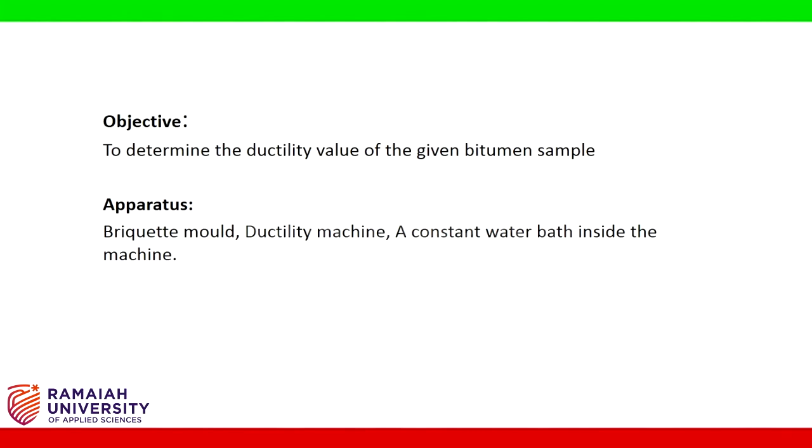In flexible pavement construction where bitumen binders are used, it is of significant importance that the binders form ductile thin films around the aggregate. Ductility is the property of bitumen that permits it to undergo great deformation or elongation. It is expressed in centimeters, to which a standard briquette of bitumen can be stretched before the thread breaks.

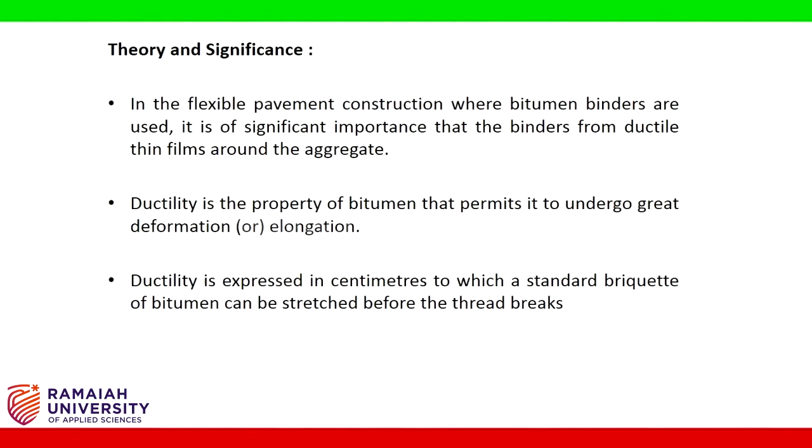Procedure: the bitumen sample should be heated to a temperature of 75 to 100 degrees Celsius, at which the bitumen softens. The sample is thoroughly stirred to make it homogeneous and free from air bubbles. Pour the bitumen sample into the briquette mold with the side clips.

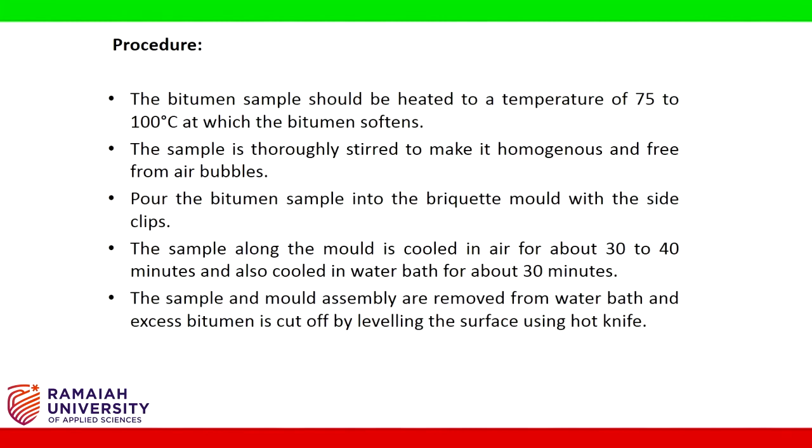The sample along with the mold is cooled in air for about 30 to 40 minutes and also cooled in a water bath for about 30 minutes. The sample and mold assembly are removed from the water bath and excess bitumen is cut off by leveling the surface using a hot knife.

After trimming the specimen, the mold assembly containing the sample is placed in a water bath maintained at 27 degrees Celsius for 85 to 95 minutes. The side clips are removed carefully. Two or more specimens are prepared in order to conduct the trials.

The pointer of the machine is set to 0. The machine is started and the two clips are then pulled apart horizontally. The ductility value is measured in terms of centimeters.

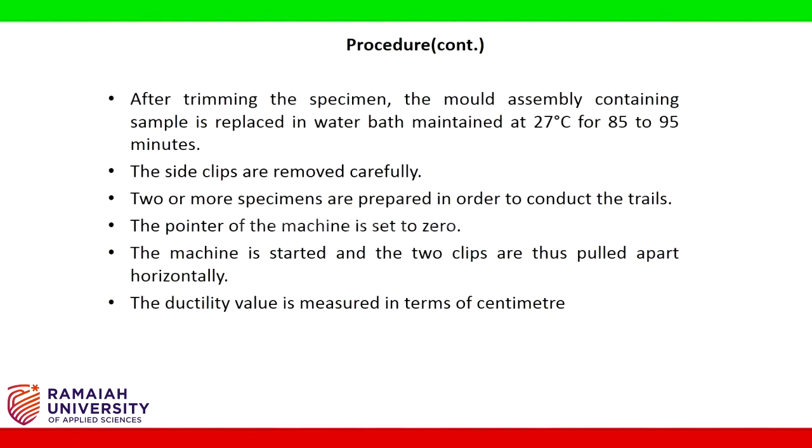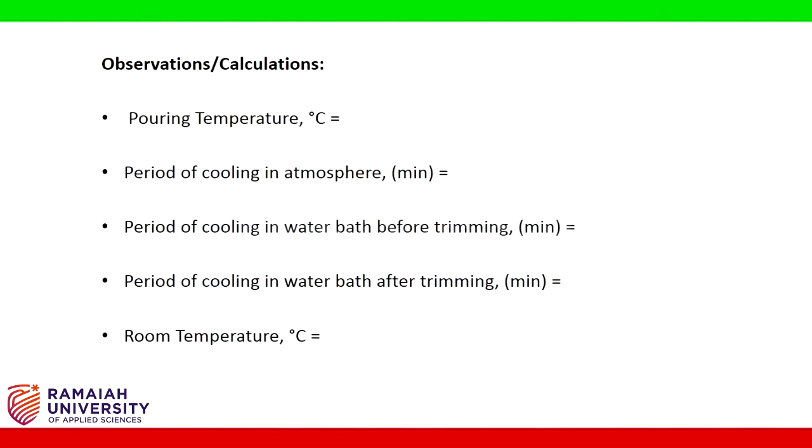Hi students, as a part of Concrete and Highway Laboratory, we are now discussing an experiment called ductility of bitumen. The apparatus required for this particular experiment is the briquette mold.

Next apparatus required is a thermometer. We require a sample of bitumen to be tested and also a hot plate.

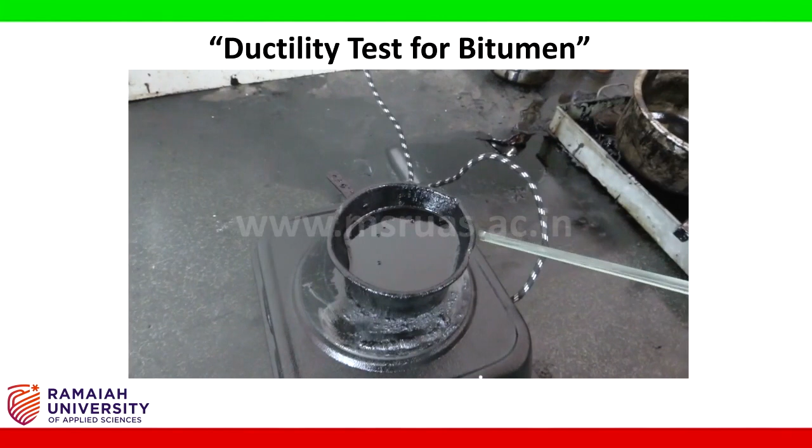Let's start doing the experiment. Make sure that the bitumen is attaining the pouring temperature. You measure the temperature of the bitumen, it should be around 125 degrees centigrade.

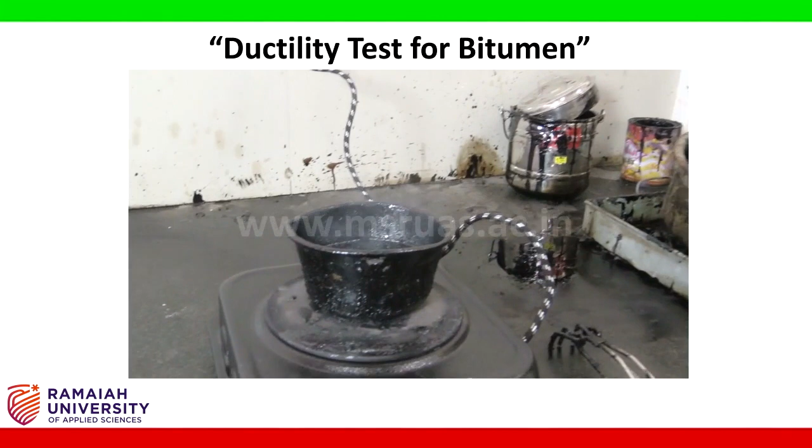After attaining the pouring temperature, we are going to transfer the bitumen to the briquette mold. Make sure that the inner surface of the briquette mold as well as the bottom plate is completely smeared with soap oil.

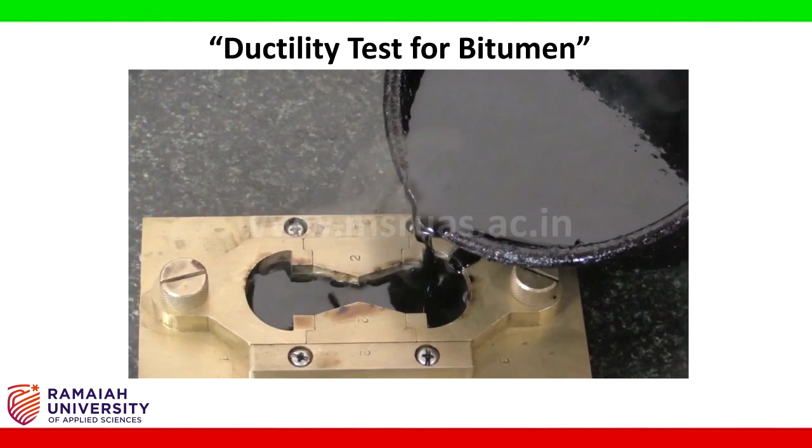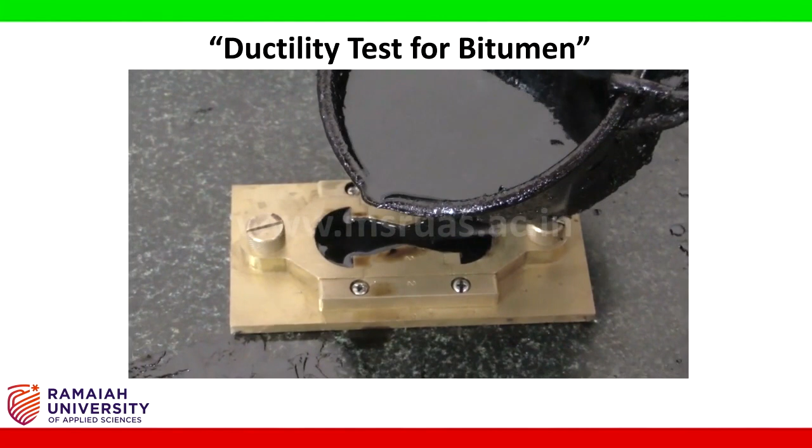Apply the pouring bitumen into it, completely to the top.

After this, we are going to make sure that the excess portion of the bitumen which is on the sides of the mold is removed completely.

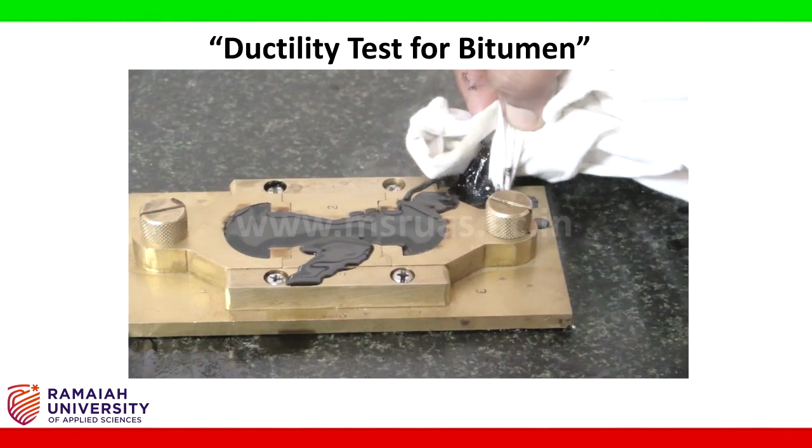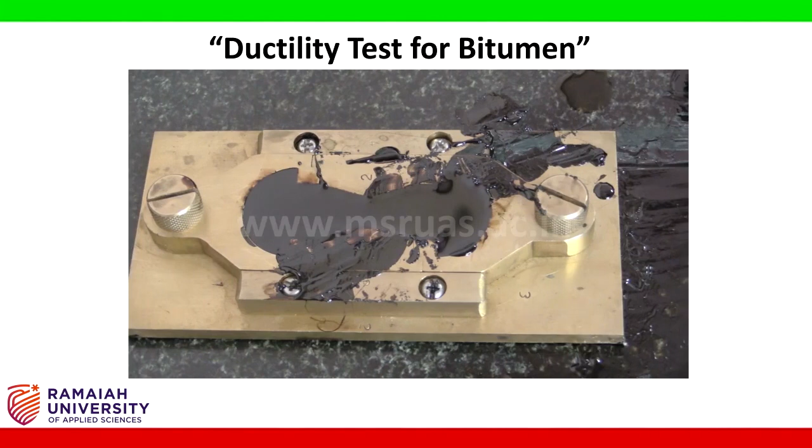We keep the prepared sample in air cooling for 1 hour as well as water cooling for 1 more hour. We do the conditioning of the sample. After preparing the sample for ductility, this is the sample we obtained.

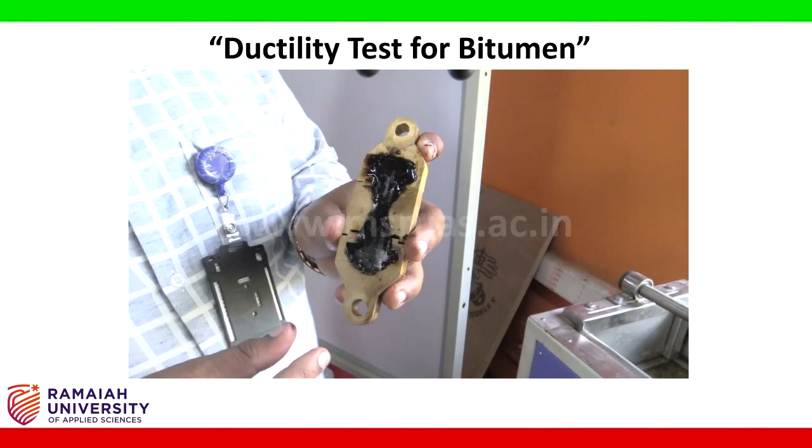This will be fixed in the ductility testing machine. So I am going to place it on the, now it is fixed. This ductility apparatus consists of a heater.

A pump and a motor, and we have a temperature controller. So when we switch on the equipment, it asks for the standard temperature to conduct the experiment. If you observe, the standard temperature which is required is 30 degrees.

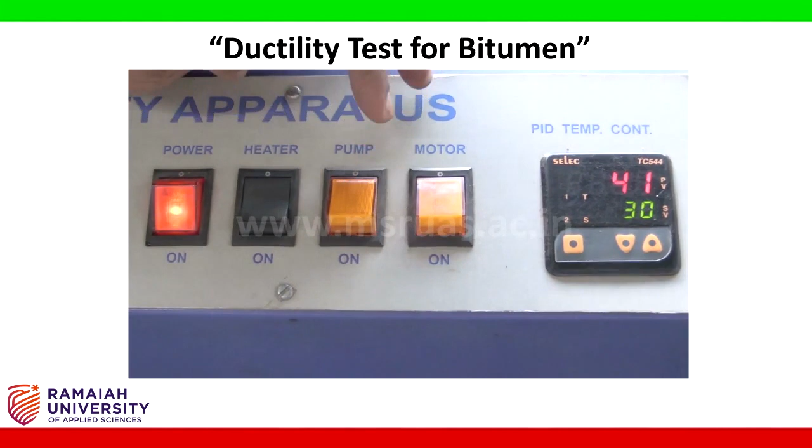If it is in a cooler condition, we are going to switch on the heater and raise the temperature of the water. Also, if you wanted to remove the water present in the ductility apparatus and put a fresh one, you are going to use a pump.

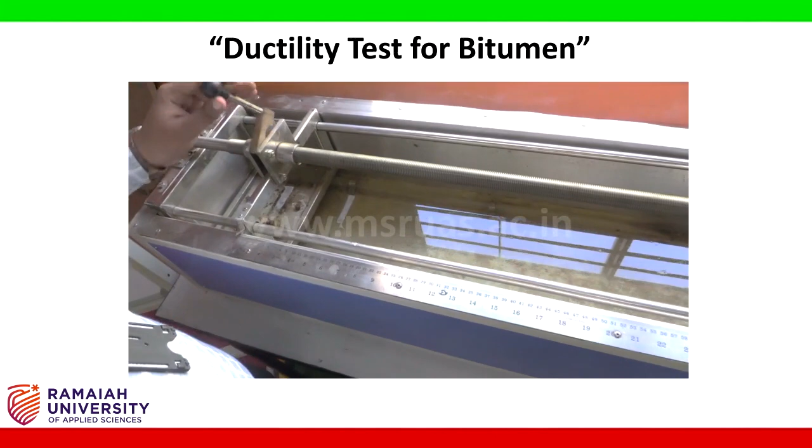The motor is for testing. When you switch on the motor, there is a shaft connected to it. Right now it's in a rest condition, it's not moving. I need to give it rotations, which can be controlled by giving the rate of pull.

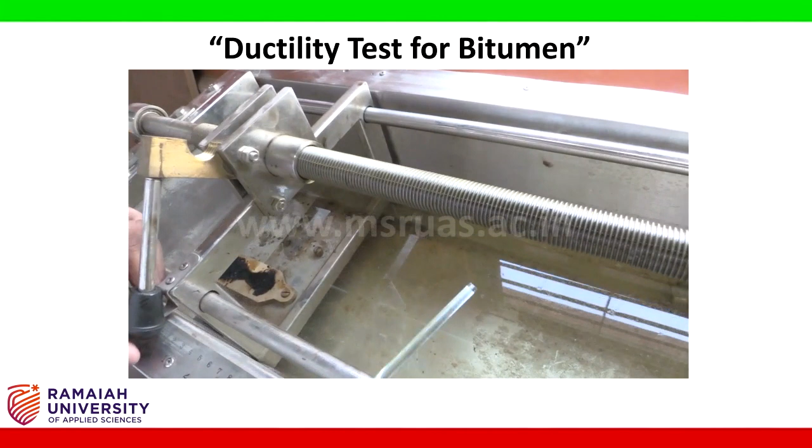Here we have 2 options: 10 mm as well as 50 mm. We are going to give a pull of 10 mm. When I give a pull of 10 mm, you may observe this is under the rotational effect, observing the rotation of this particular system.

After this, I am just going to lock it. When I lock it, you are going to observe the pull in the specimen.

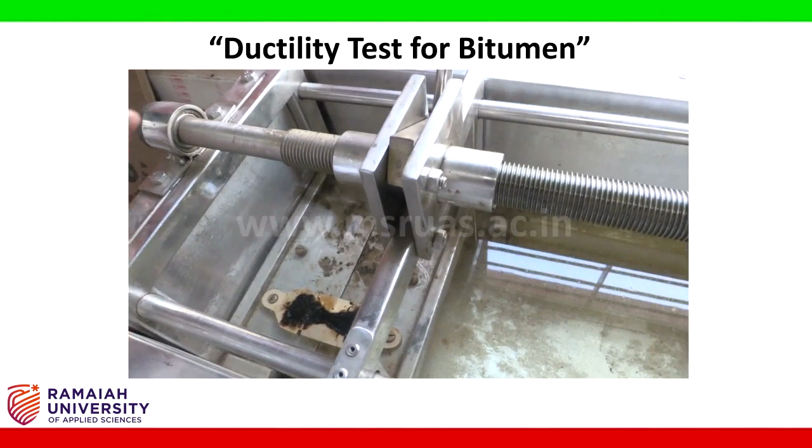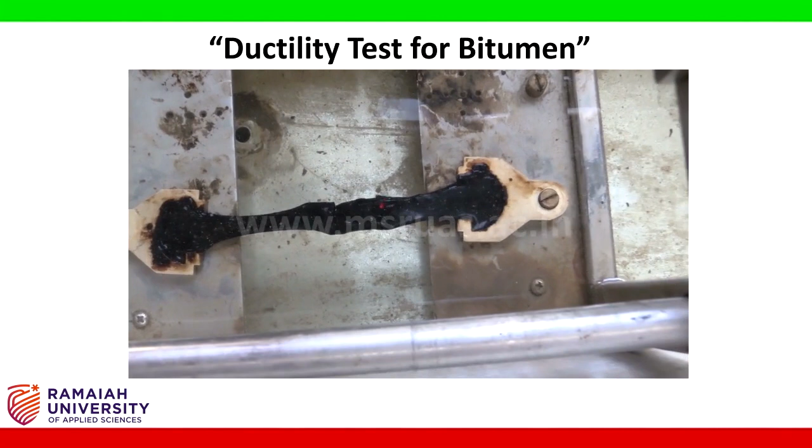What's happening here is this bitumen sample is elongating. If you keenly observe, there is a graduated scale attached to this moving system.

Our failure will be considered under 3 conditions. One: you start elongating the sample and at one particular reading, thread formation happens and the thread cuts. That particular reading will be taken as the ductility value of the bitumen.

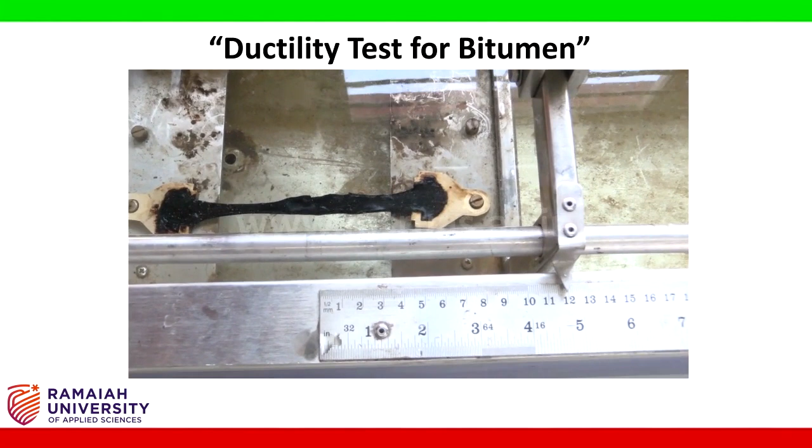In the second condition, if no cut happens and the thread is not going to cut, it will elongate beyond 100 centimeters. In that case, the ductility value of the bitumen will be taken as 100 plus.

In the third case, it neither fails nor expands above 100 centimeters. In this case, sagging happens, meaning the bitumen sags and touches the bottom of the ductility apparatus. Whichever value where sagging and touching occurs, that reading will be taken as the ductility value of the bitumen. Observe, there is formation of a thread and sagging is about to happen.

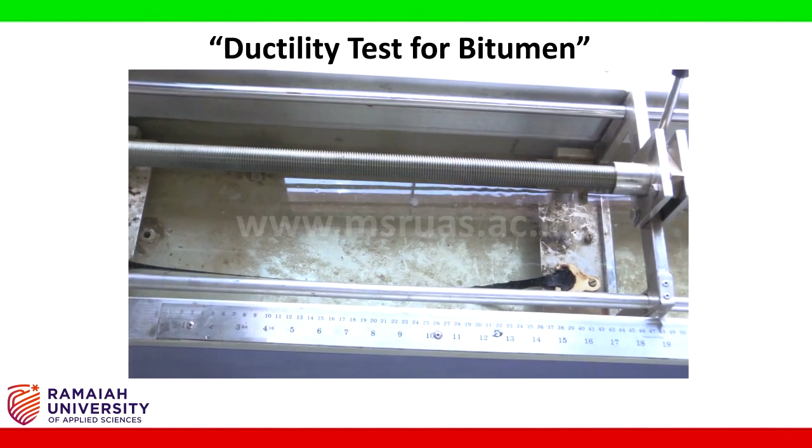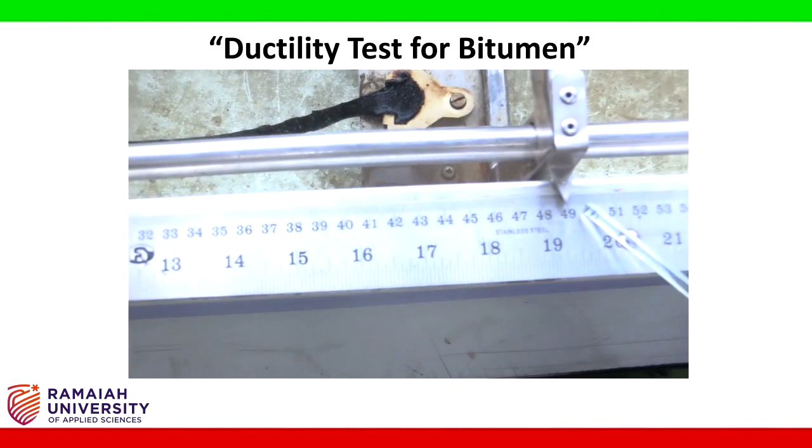Yes, it touches the bottom. This particular reading, 49 centimeters, is considered as the ductility value of the bitumen. So this value will be taken as the ductility value of the bitumen.

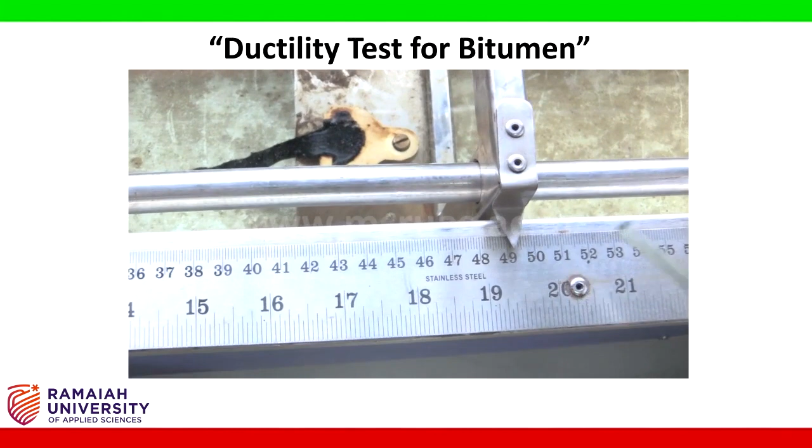So this completes the ductility test on bitumen.